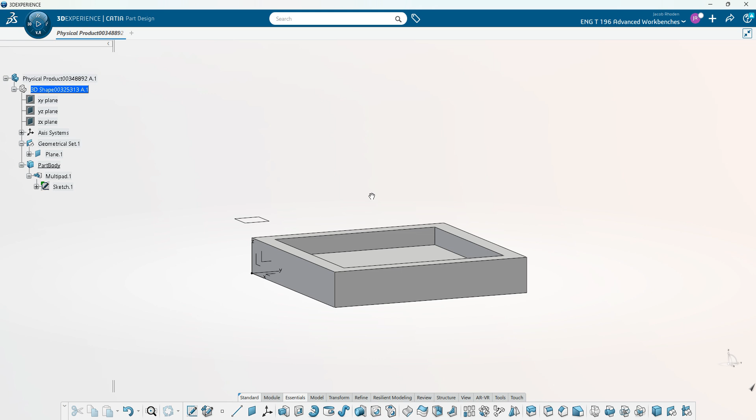Hi, this is Jake Rhoden back again for another CATIA 3DExperience prismatic machining video. This time we're going to be going over pocketing.

So here we can see our part design, little part that we made. So obviously we just have kind of a little part, and then we have this big pocket in it right here. And obviously we have our safety plane. You can see we just did a multi-pad, so we just did two squares in a sketch and then raised one up a little bit more than the other.

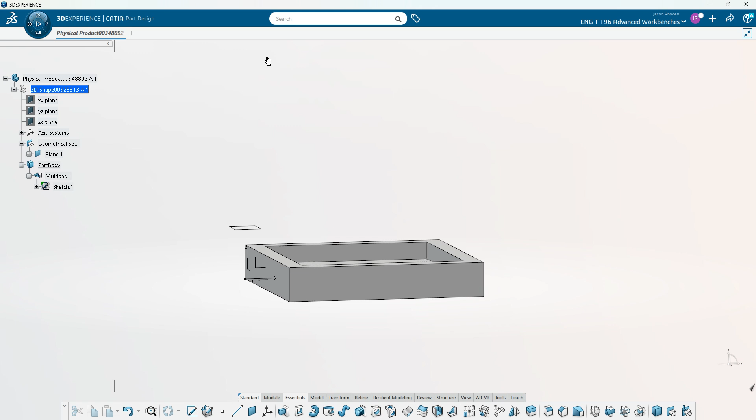Alright, so same as always, jump over to prismatic machining. Then obviously we're going to make our generic machine again. And then our rough stock. Now for this, since we're going to be doing pocketing, let's make sure we can see it right.

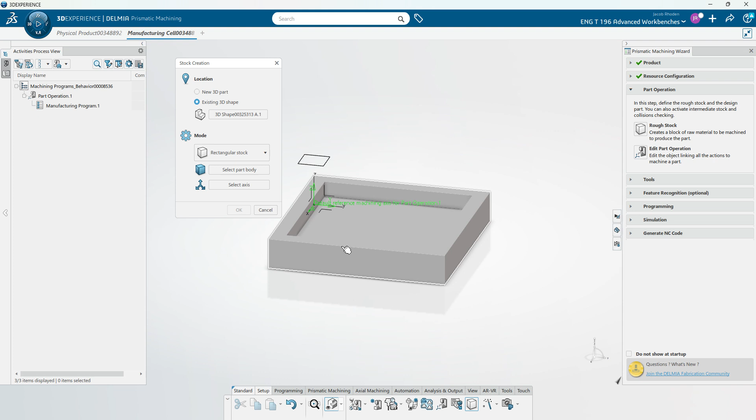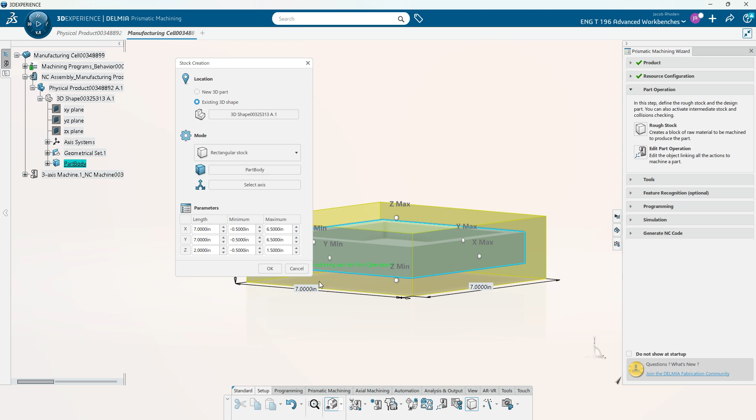There we go. So typically if you were making an actual part, your stock would not be perfectly the size like this. You would have it out a little bit on all sides. So you'd have to come in and do these profiling sides, milling out this side, and then doing these facing cuts. But just for this example, we're going to keep it to size, since all we're going to be showing off is just this pocketing.

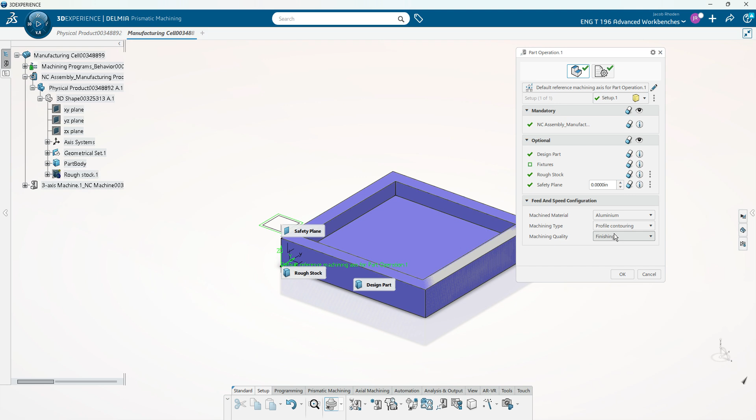So obviously we have our rough stock. As always, let's hide that. Edit our part operations. So we got our design part, got our rough stock over here, then we have our safety plane right here. And then with your feed and speed configuration, it's optional, but if you're doing it for pocketing, that's going to be profile contouring.

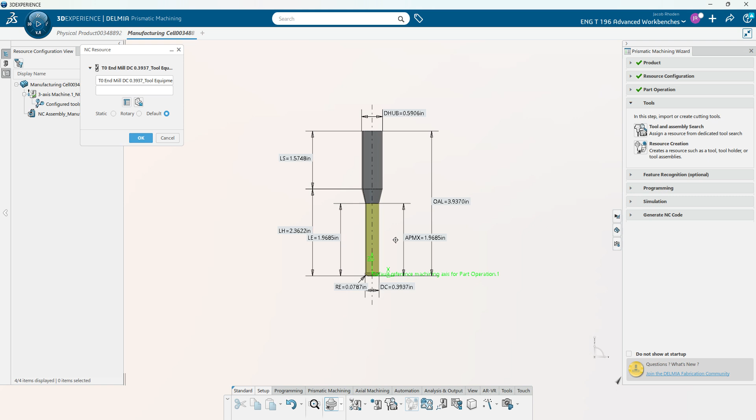It's not going to be grooving or face milling or any of that. You could leave it undefined, but for this it's going to be profile contouring. And then I'll just switch over to finishing, just because, can't hurt. So press OK. Then we're going to make our end mill. So this is going to be a little bit different than usual, at least when we've built end mills.

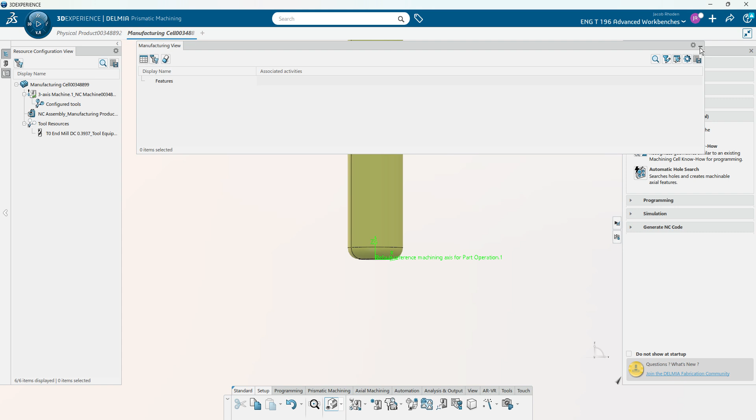So typically, you can see down here, this end mill has a radius. Now, if we jump back over to part design, you can see here that there are no radiuses on these corners, or on these internal edges. This is a flat 90 degree. And you could get this if you simply, let's hide that, if you edit this end mill,

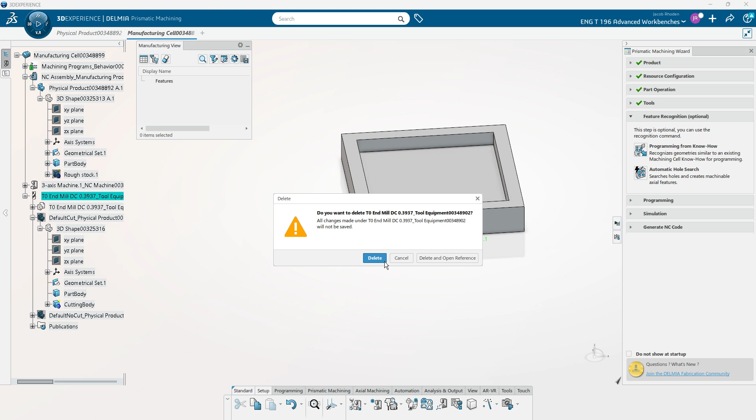where'd my end mill go? Is the end mill hiding? Oh, here we go. Is it gonna let me edit it? No, okay, let's delete that end mill. Yes, delete it. Let's make a new one. Resource creation. End mill. Here we go. So we're back to where we were.

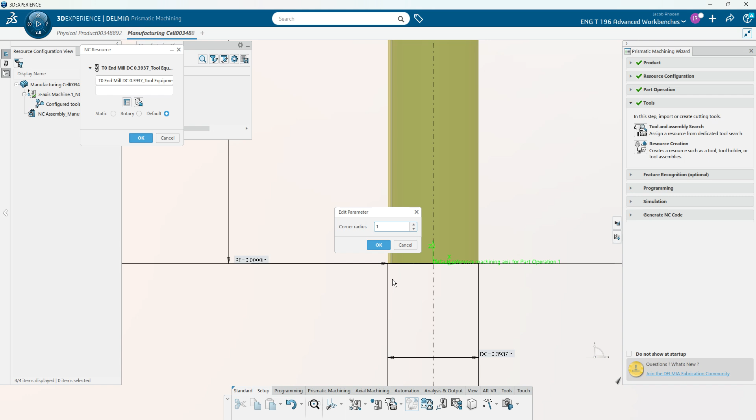So now, if we wanted that to be that true 90 degrees, we'd have to take this radius and make it 0. But depending on the fitment of your part, if you have something that needs to fit right at that 90 degrees, then yes, you'll want to make sure that you have just a 90 degree, no radius. But a lot of the time for structural safety, it's good to have that bottom edge of your part actually be curved, because it's leaving a lot less points for stress and a lot less points for breakages.

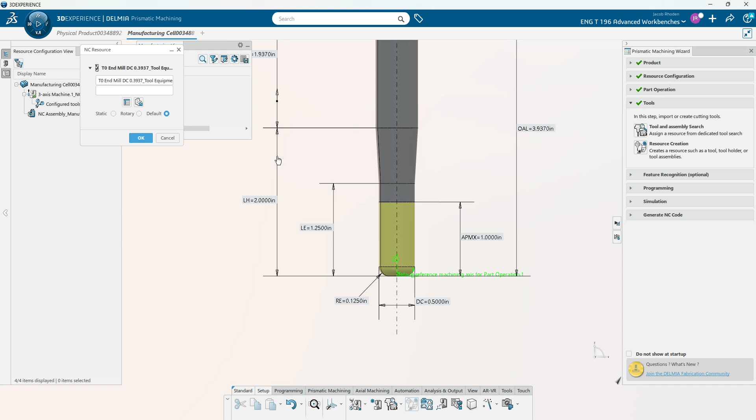So we are going to leave a radius on this. So obviously it's not true to the actual final part. So if you were designing this part, or if you're programming, you always want to make sure that you're keeping it true to the part. But for this example, we're just going to say that we want to use an end mill with some radius on it to keep a little radius on it.

So we're just going to make a 1/2 inch end mill. Doesn't need to be super long, because I think it's just a 1/2 inch pocket right there. Not doing any feature recognition. We'll jump over to programming. This will be in prismatic machining. You can see right here we got pocketing.

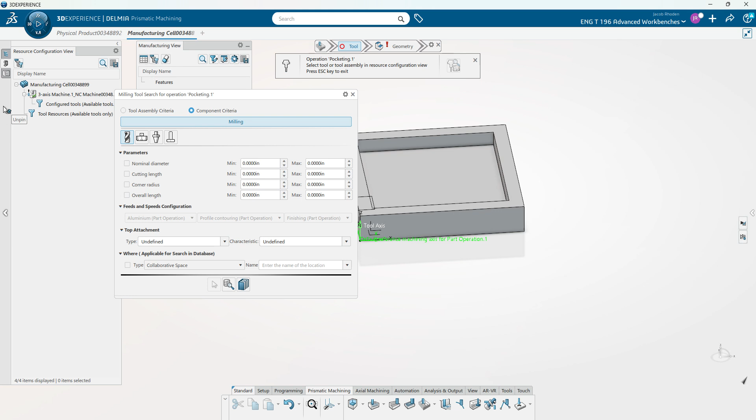So now, same as usual with the tool selection, let's go select our tool right here. Don't want to keep searching. And then for selecting the bottom plane, you can kind of see it here in this little pictogram.

So this is not the bottom plane. This is going to be the bottom of our pocket that we want to select right there. And then it'll automatically select the contour of that pocket. And you can go in and delete this contour and change it if you need to. But here it's just auto-selected the 4 kind of walls, the 4 contour points that we're going off of.

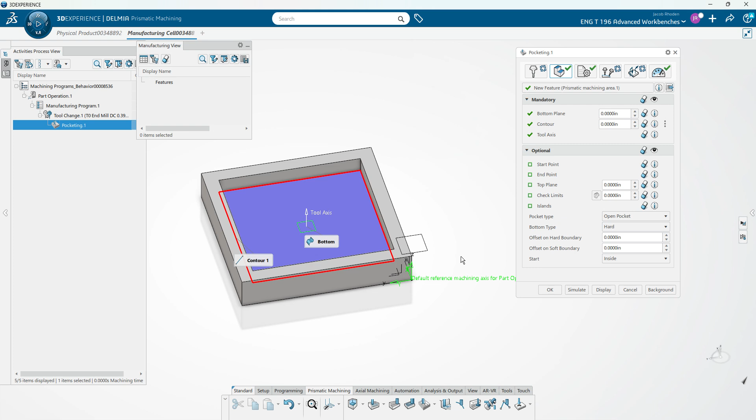And so then obviously you have all your other options: start point, end point, your planes and everything, islands, any pocket types, so if you have a closed or open pocket, so this is going to be a closed pocket. Bottom types, offsets, any of those things you need to do. Obviously we have our tool in there, of course.

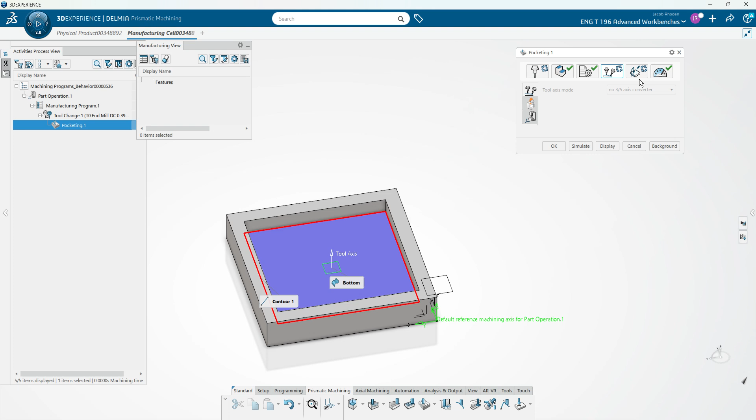We have the different types of paths, so we can go in helical, back and forth, offset one way, direction of cut, so if you want to do climb or conventional milling, tolerances, compensations, tool diameters, if you want to do it in levels, finishing passes, all those kind of different little things you can get into. If you're doing different axes, and then we have, same as usual, our macros.

So let's open all these up, and select our safety plane for our approach and retracts. Our clearance has already selected our safety plane as usual, and then for our linking, retraction, approach, we got to put those planes in and select those. So, put it in, and just same as usual, you're pressing this little axial motion up to plane, press on that pink plane, press on your safety plane.

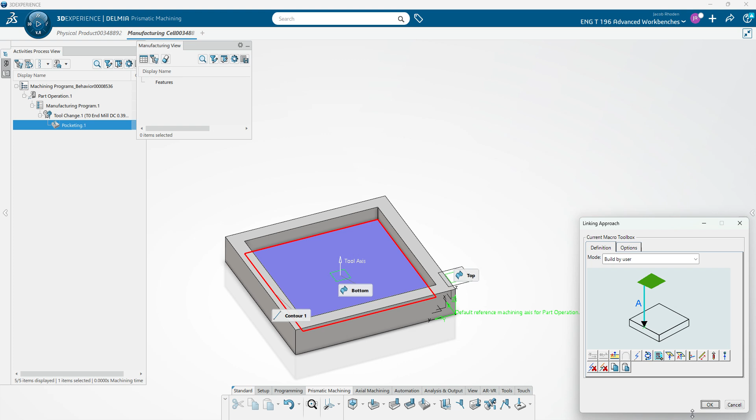So once we've got those in, and then we got our feeds and speeds and everything, we can double check that everything looks good, and we can press simulate. And obviously we can see here, we have our end mill coming down into the middle, and then dropping down into that part, and we can see the tool path of it going around axially and cutting all that up.

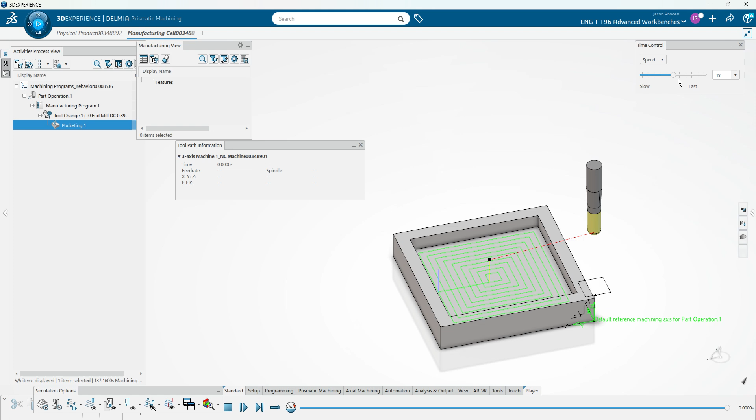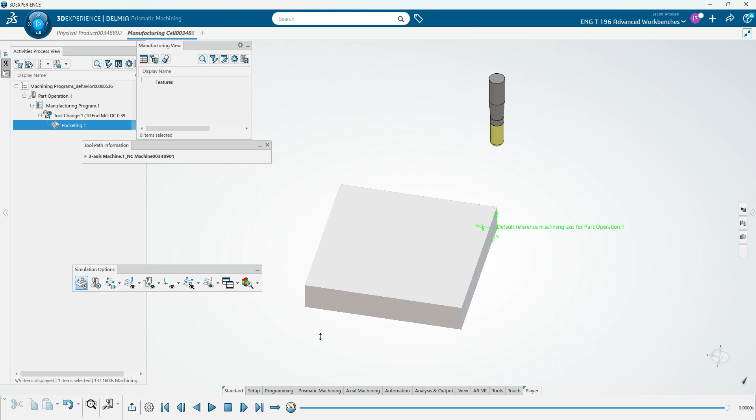Now we can turn our speed down so we can see it a little bit better, and move simulation options out of the way so we can watch this, and we can watch as it comes in and runs around the whole part. And now what we can do as well is press on our enable disable material removal deposition, and as usual, if I can get some of these things out of the way so we can zoom in and see it a little better, we can watch it actually remove that material.

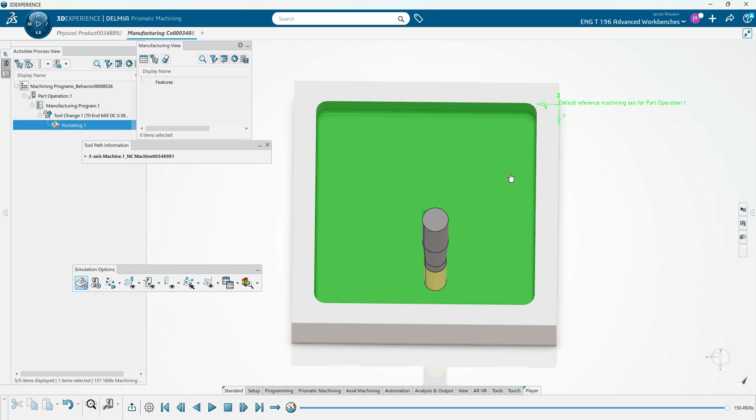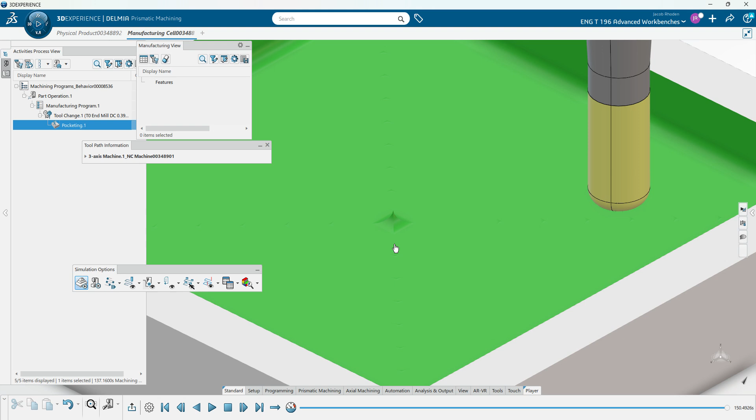Another issue we can see here that we would have to go back in to fix with that program is obviously it's leaving right in that middle a little line. You can see a couple others, and that is because the way that this was automatically programmed, it's not clearing out that whole bottom face because it's got those round surfaces, so it probably just went right around this and avoided it. So you'd want to go back in the program and make sure that that got cleaned up, so you're not having to do anything in post-processing to fix it.

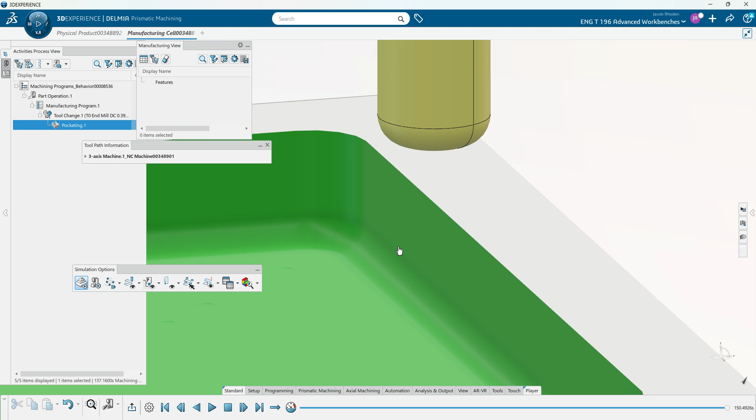And then we can also see, if you can get a good look, that these bottom edges, because this tool is curved, it's got that radius on it, it is keeping that radius in there. And as I said previously, that can be really good for keeping these walls strong. But obviously if you have something that needs to fit into this pocket that does not have radiused edges, you might have some issues. And that is how you make a pocket in CATIA 3DExperience.